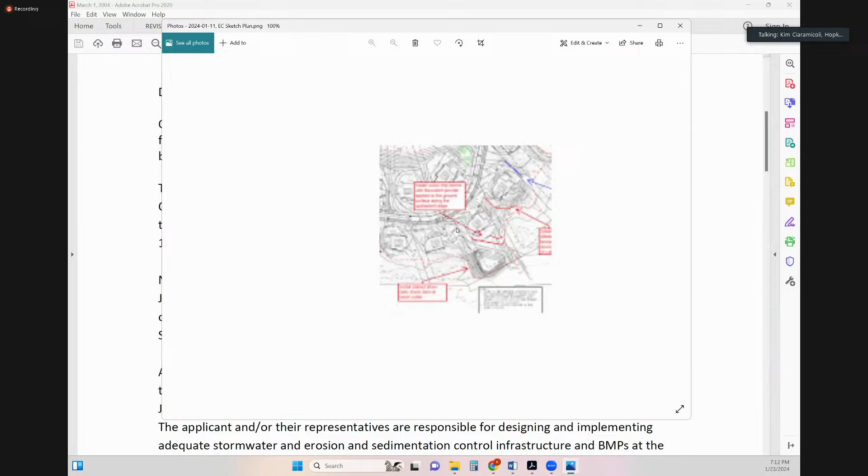They responded the next day. They had their consultant, ESE, out at the site to evaluate the wetland and to make some erosion and sedimentation control suggestions. My understanding is that these suggested BMP measures by ESE were implemented almost completely by Toll Brothers. I think there's one BMP left to install. So the applicant has been responsive, but we do have the history of repeated violations.

I do note that the enforcement order we issued required that the permanent BMPs impacted by fine sediments shall be cleaned as required. So I would question the applicant as to whether that occurred in this particular BMP, which had the discharges. The EO also required temporary or permanent stabilization of as much land area as possible at the subject property. So the commission should probably also evaluate whether that portion of the enforcement order was followed. I know that Mr. Merchant is on the call tonight, so I imagine he is also prepared to speak on this matter.

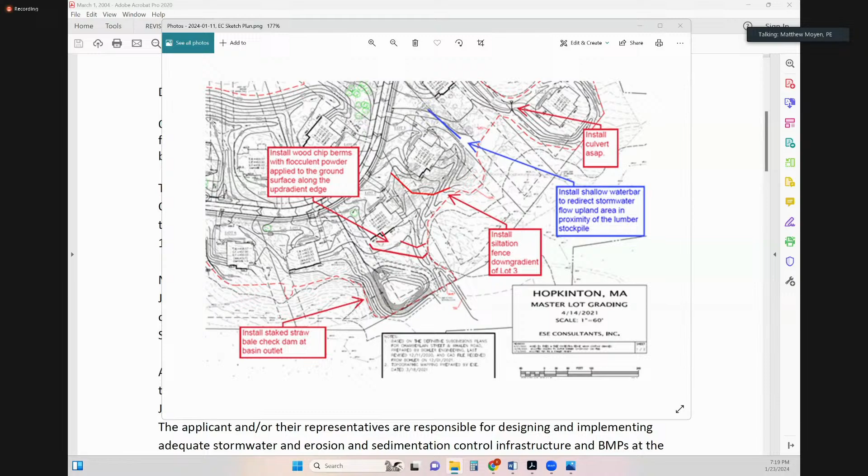Okay, the concern I have there is cleaning them out—just taking the sediment off the top doesn't necessarily guarantee that the infiltration rate is being maintained for post-construction use. So I think it would be wise to reevaluate the infiltration rates at each of these locations prior to street acceptance, assuming that's the case here by the town, to ensure these are going to function long term and that construction runoff hasn't prohibited recharge from occurring.

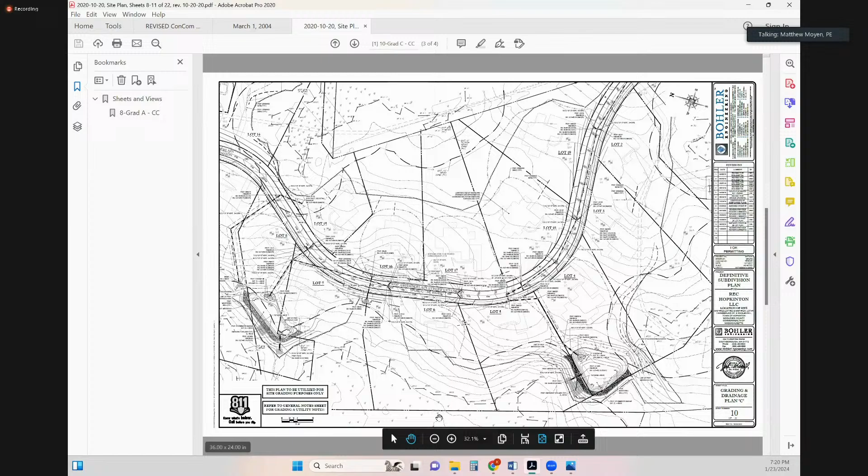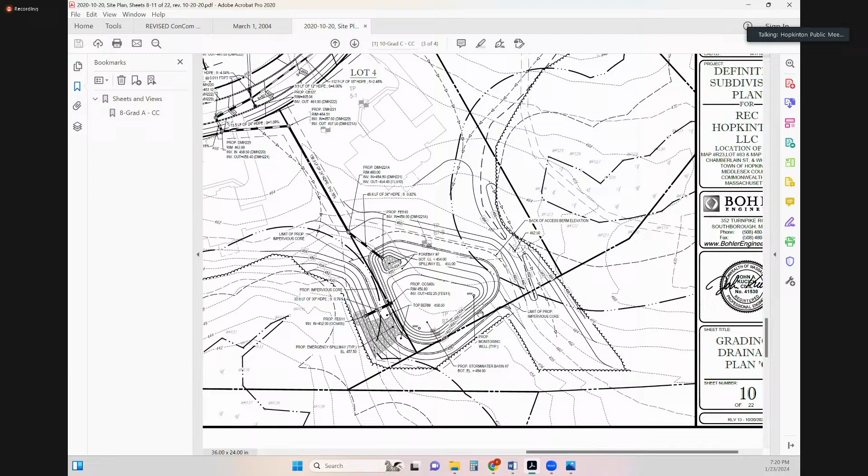So Matt, we would do that following construction, right? Yeah, okay, it's kind of a punch list item. Yeah, once the site's stable and there's no more sediment being directed to the basins, that would be the time to ensure they're still functioning as designed.

Yep, because a lot of times what happens when they get used during construction for sediment control, they choke up and they don't recharge like they were originally intended to. They turn into big soupy messes that really aren't compliant with the standards.

Okay, good point, thank you. Other questions or comments from the commission or from the public?

Jeff, I have a question or comment. Go ahead, Ted. I'm trying to understand, and maybe Kim or Mr. Merchant can help me, where these lots are in the development. I'm also flipping through the photos. Kim, I'm looking at the photo that ends 742 JPEG.

If you wanted to pull that up. What I'm trying to see, Mr. Merchant, is when we talked about violations before in the development of this lot, we talked about how much earth was being moved and left uncovered or barely covered, and whether building the lots required that much clearance. It looks like from the photo I'm looking at, again Kim, the last three numbers are 742, this is another violation next to a radically cleared lot.

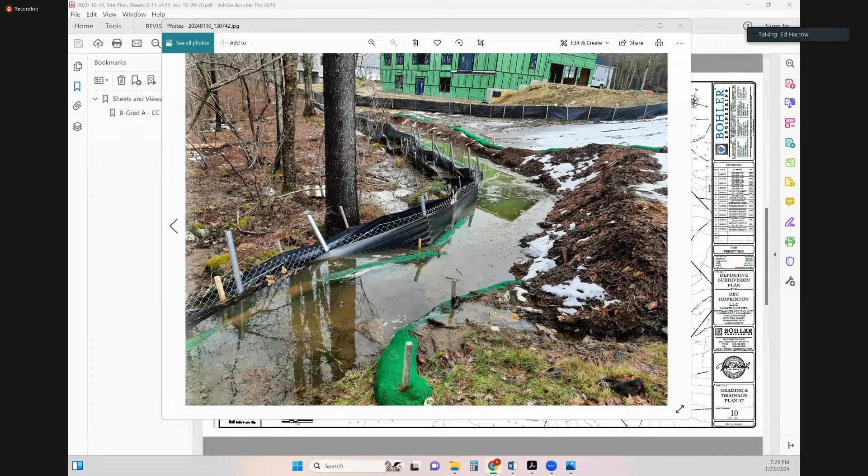But back in December, I have a picture of the Mississippi River flowing down Stony Brook. The bridge at the old Hopkinton Springs down in the DCR behind our house was overtopped with water. So the amount of water that we're getting is way outside of historical norms.

Can I say something again? Yes, Ed, that's true - this year has been historically odd, but it hasn't been every single year. But we will probably get more epic events, and I think we just need to continue to really push for limited disturbance, if you will, before it's stabilized.

I think one of the arguments presented in regards to this development was that there needed to be access entirely around the building for, I don't remember, but maybe a crane for trusses. And we're just going to have to limit as best we can how much area is wide open and not stabilized. But I think this is the time that we can start looking at that a little bit heavier, a little bit more. Jeff, if I may.

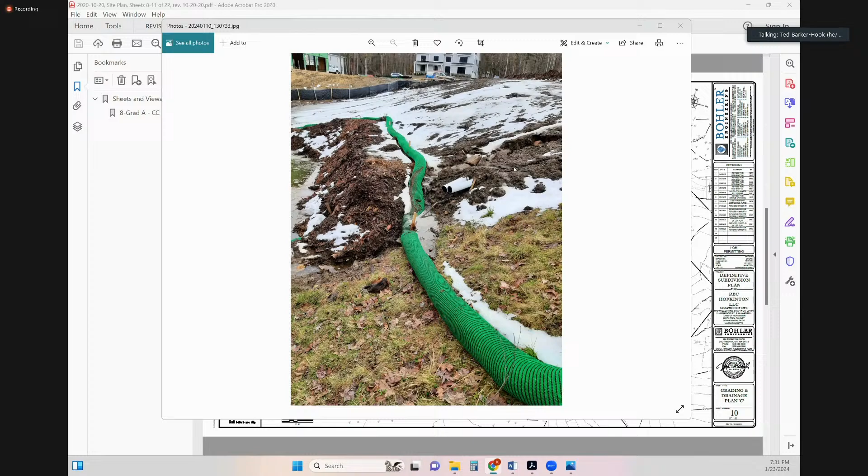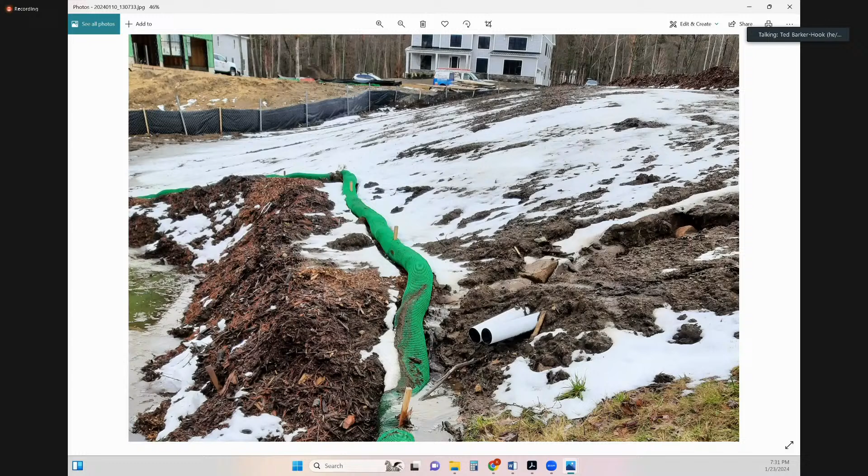Yes, go ahead. Kim, I'm glad you found that photo - I was about to point you to that one as well. Is there any chance you can zoom in so we can see? That just seems absurd to me, that much land had to be cleared downslope to the wetlands. I don't see any straw underneath any of it. That just seems utterly and completely reckless and unnecessary. And I think that goes a long way to explaining, with all the rain that the world now brings us, what happened here.

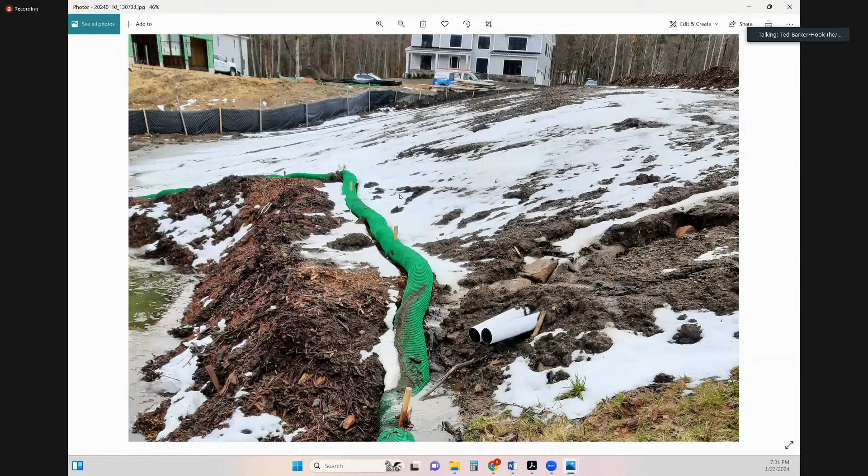So that's extraordinarily frustrating to me. Through the chair, this is Ted again. Y'all may remember back when we were talking about the project in the Blueberry Lane area, where I was quite unhappy about the amount of clearing that was going on those lots, and I was the lone holdout that said this is a bad idea. Just bringing that to your attention.

Okay, thank you. Good comments, Mr. Merchant. I think you folks have ongoing work at this site, with the Blueberry Lane subdivision upcoming. So I think there are a lot of good points made on the call that we need to be more deliberative about minimizing the amount of land clearing going on around these subdivisions.

I think to answer Ted's first question, these types of rain events are unfortunately going to be more common. They're not anomalies anymore. We've had 3 or 4 of them this year alone, where you could basically take a whitewater raft and raft down some of these properties. That's how much water was flowing across them. But all good points, and I think as a commission, it's also incumbent on the developers to minimize disturbance so we don't see this happening on a continuing basis.

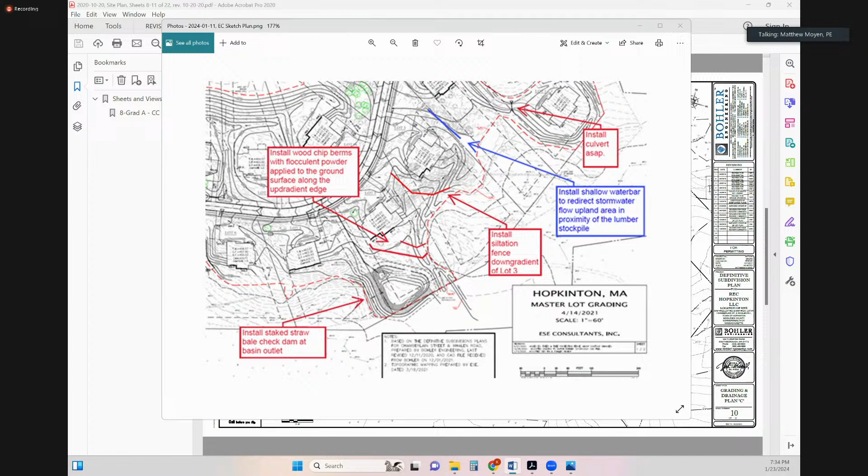Just real quick as it relates to the limits of disturbance. I understand what Mr. Merchant's saying about trying to minimize that, and I get Ted's point about looking at doing it more. I think one of the things that really needs to be focused on, regardless of the disturbance limits, is temporary and permanent stabilization of those areas that are disturbed. From my experience, these residential lots, once graded, don't really get touched again during construction. So they should be temporarily stabilized within 7 to 14 days of that work being completed. It seems like in these pictures, a lot of the lots remain unstabilized. I think that's an important measure that the contractors should be taking, moving forward with this site and any others in town.

Thank you, Matt. Part of the compliance with their construction general permit as well.

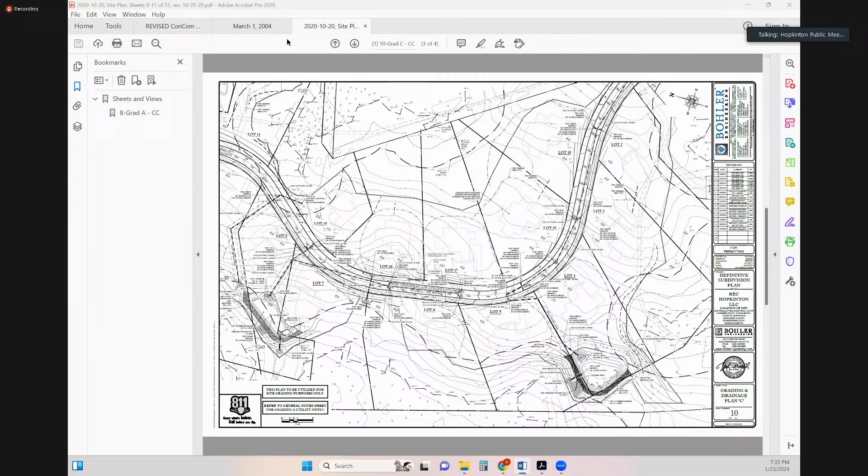Yep, okay. So hopefully, Mr. Merchant, you heard the messages from the commissioners, and if we can tabulate the fines, Kim, we'll look at those at the next meeting as a commission. Will do. Okay, thank you, Mr. Merchant. Thanks. Okay, so we'll move along to the new hearings.

22 Kruger Road. This is a notice of intent to raise and enlarge a single-family home. The Hopkinton Conservation Commission will hold a public hearing on Tuesday, January 23rd, 2024, at 7, virtually online, to hear all persons interested in the notice of intent filed by Terry Anthony to raise and enlarge a single-family house with associated site work. The location is 22 Kruger Road, Assessors Map R8, Block 14, Lot 0.

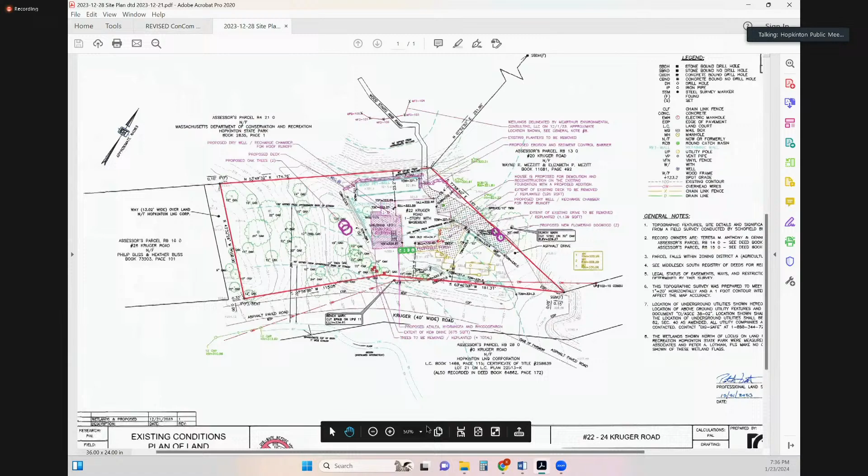Okay. Do we have the applicant or a representative of the applicant on the call? Yes we do, hi, I'm Susan McArthur. Hi, hey Sue, how are you doing? Good, good to see everyone. Yeah, good to see you. You want to give us a little bit of background on the project, if you would please?

Yes I will. Also on the call is Tim McKay, who's the architect for the project. The applicant, I don't believe, is on the call. And just so you know, DEP hasn't issued the file number yet. But yeah, we filed a notice of intent for the tear down of an existing house at 22 Kruger and the construction of a new house within the existing footprint, only slightly enlarged.

So currently, the property contains a 2,900 square foot single family home, bituminous driveway, attached garage down in the back, a large wooden deck, wooden retaining walls, a fenced in garden, and wooden stairs leading down to the back slope to the DCR property in the back. Topography ranges from 334 near the roadway down to 321 feet at the existing house.

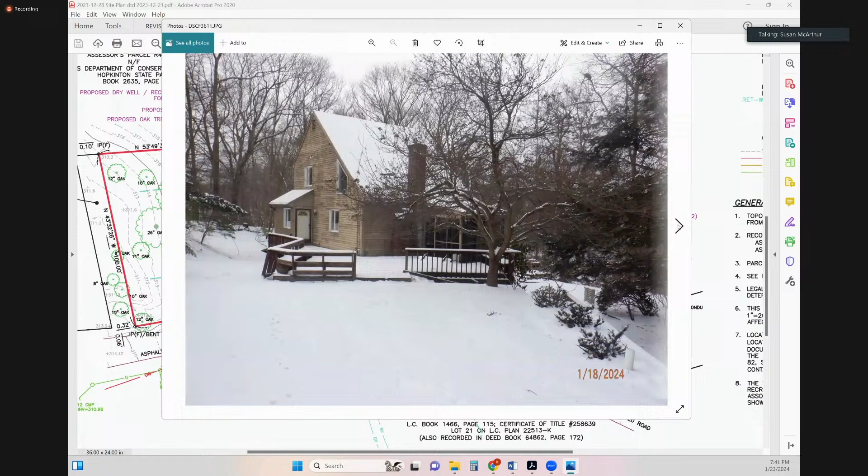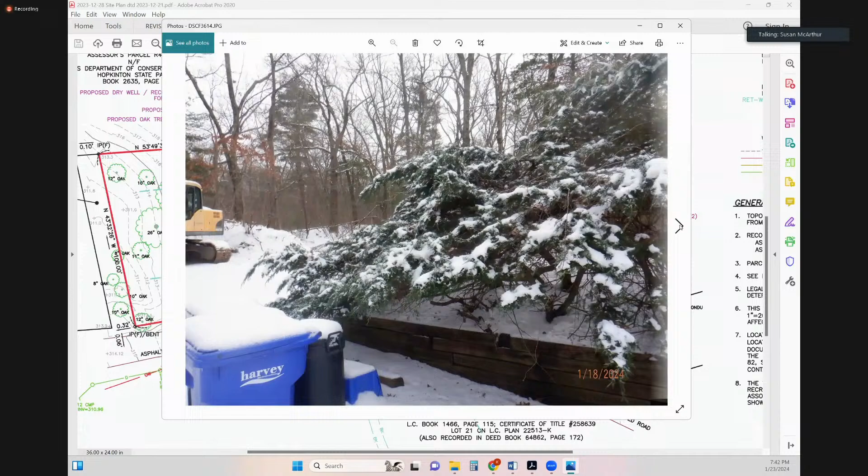So that's the driveway covered in snow in the back. There's a few photos in the NOI.

But anyway, to mitigate for the removal of the 4 oak trees, we're proposing to plant 2 flowering dogwoods where the pavement will be taken up over off to the east side, and 2 oak trees to the west, where the hand is right there, west of the new house.

And then a few shrubs, those 4 green circles out in front of the new house, right there. Those are proposed azalea, hydrangea, and rhododendron shrubs. And I think that's about it.

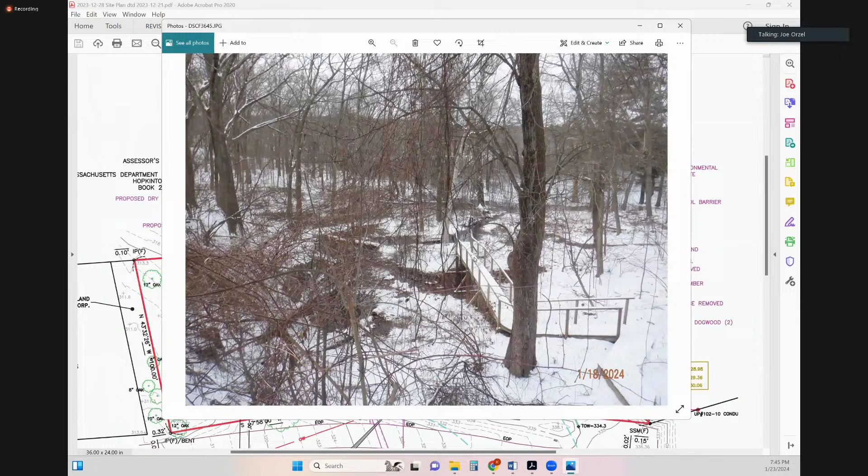Regarding the wood stairs and the ramp, I don't know the history of that, or if that was a permitted activity. They do go through the wetland down there. There's some Oriental Bittersweet and common privet on the developed portion of the site. That's not extensive, but there's some present. Would recommend some comment on how those will be addressed during construction.

Also, the project narrative notes that there are 4 oak trees proposed to be removed for construction of the driveway. When I was out there, there were at least 6 oaks and hickories marked with a red X, so just looking for confirmation on whether that's an accurate number of trees proposed to be removed, in that general area where the red X's are shown on the plan. The contractor had marked where he thought maybe the trees were going, but we determined only 4 need to come out.

The stream across the street is delineated, but no delineation flags are shown. I don't know if that's because it was off-site, or how that stream was located on the plan. It looks like it's generally pretty accurate, just pacing out where it's shown to the edge of the road, but maybe a comment on how that was located and possibly showing the actual delineation flags. Without the actual delineation being shown, I don't know how certain the commission can be of verifying the extent of the buffer zones on the site.

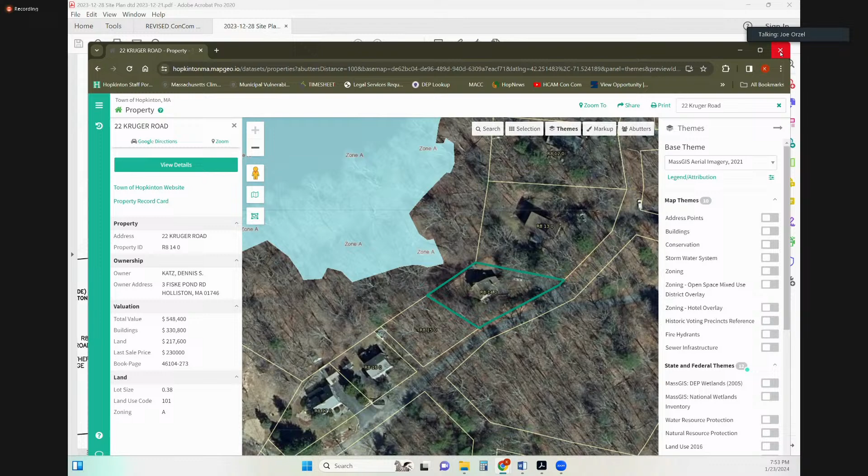Okay, can you go back to the plan, Kim? Thank you. Okay, there were dry wells proposed. Just thought that some calculations regarding the sizing of the dry wells be provided.

And then just some relatively minor notes and some items in the BVW determination forms that don't really affect the determination of wetland or upland. Also a note on whether or not, although the color plan was provided, it doesn't meet the requirements of the bylaw colors. I don't know if the commission is too worried about that or not, but I just thought I'd point that out. And as Susan mentioned, there's no DEP file number yet for the project.

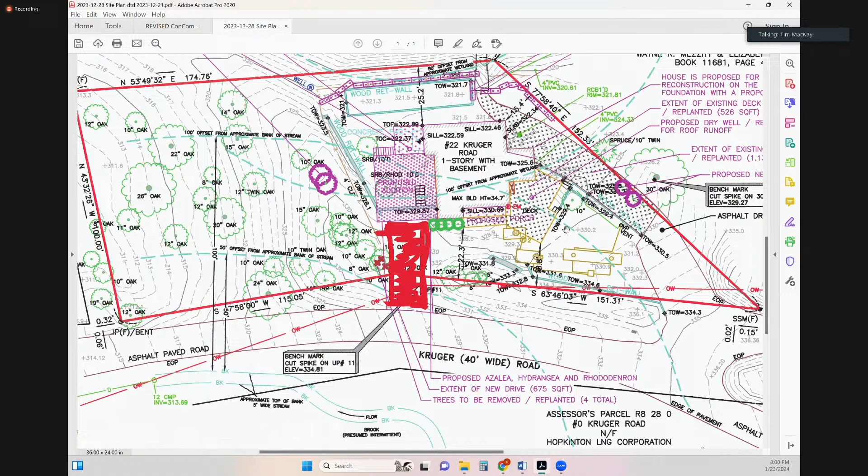I'd also like to note that the proposed foundation wall for the garage will handle the majority of the retaining. Where the wall exists running parallel to the front of the garage, that wall will no longer be there. We looked at removing entirely the wooden retaining wall that juts out at an angle. However, we were concerned that taking it out entirely would disturb the vegetation above, and that's not anything we're interested in. So as much as we can, we will retain the profile of that wall and replace any compromised structure along it as much as possible. The intent here is to preserve as much of the natural vegetation on site as we possibly can.

I certainly appreciate that, but there needs to be notes saying what you're going to do with the existing walls, whether you reconstruct it with a masonry wall or something else. Right now there's nothing there, including the garage area in the back. I think until we get out there, it's going to be difficult to really understand what the scope is. The note could say existing to remain to the greatest extent possible, if that makes sense. I don't know, I'll open it up. I'm just very uncomfortable with not specifying what's happening with that. If there are changes to the plan, we'd be certainly happy to come back before the commission, but until we get out there and really start evaluating the structure of these retaining walls...

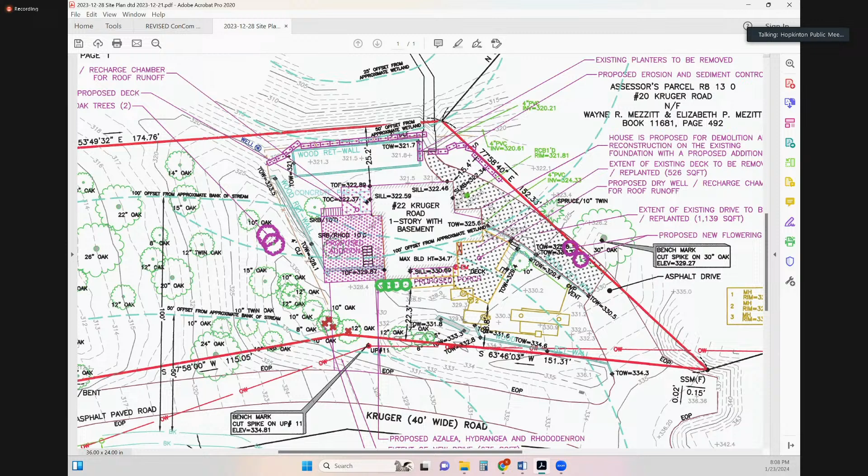So Sue, there's some T's that need to be crossed and I's that need to be dotted here on your end. Yeah. So I think we need to continue this out. But before we move on, I just wanted to ask about the bridge on the state property there.

The wood stairs and the ramp through the resource area, was that put there by the owner? No, they told us it was there long before they bought the property. Okay, it's been historically there. So, I mean, they're not in the best of shape, but they're functional. Yeah, it might be better to hear that they're in real good shape, because at some point in the future, the next owner may come and feel like rebuilding it, even though it's on DCR property. Well, I suspect this owner is going to be there a long time, given the fact that they're building a new house for themselves. So, oh, there you go. Okay, well, that's my guess, but yeah, okay.

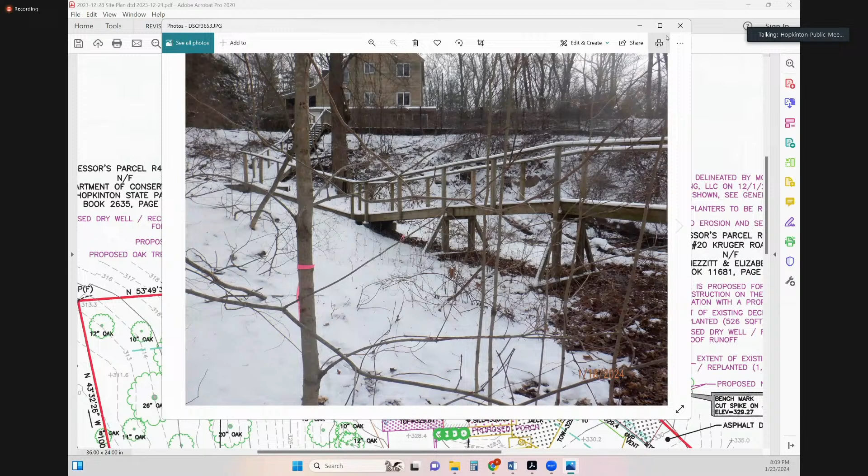Okay, I just wanted to bring that up. It's on DCR property. Okay, I'll have to think about that. Maybe we can talk about it.

I have seen and helped with permitting for other properties on Lake Cochituate in Natick, where they've gotten permission from DCR to put stairs and a boardwalk on DCR property going down to the lake. So I don't know that this is that unusual.

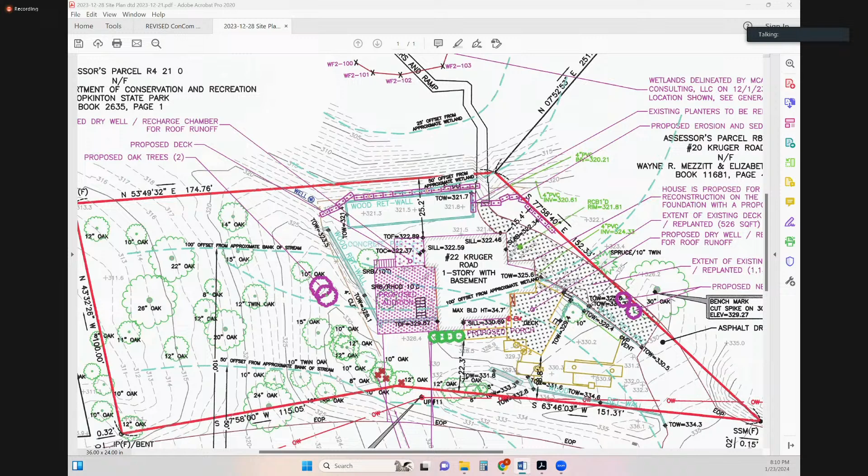Okay, we got to move on because we have an executive session coming up. Chair, if I can get two words in. Go ahead, Ed. Living adjacent to DCR property, I can confirm there's more than one occasion where such things exist. We're aware of that, but thank you. I can confirm that. Okay, Sue, so we'll continue.

If I can get a motion to continue the hearing, is February 6th going to be sufficient for you to address the items we've discussed? Through the chair, do you want to get public comment? Oh yeah, sorry, Anna, is that what you're going to ask? Yep. Is there any comment from the public at this point?

Hi, this is Heather Bliss. We're an abutter to the property. This is the first hearing or notification we had about the building and development, so we do have some questions in terms of the tree removal noted in this plan versus what we're seeing in terms of the trees marked. There's definitely dozens of trees with red marks on them, some very close to our property. I assume that was part of an initial test and not for removal, but certainly close to our property line, we did see red paint on trees, and it seemed to be dozens marked. Am I wrong in how many are marked with red paint in that area?

May I address that comment? You may, go ahead, Mr. MacKay. As part of our survey to identify the trees on site, we did mark them just to note that we had recorded them. As I noted earlier, we have zero intent of taking down any tree other than what is absolutely necessary to put in the driveway. We're hoping to reuse the existing driveway, however part of it's on an abutter property, and that driveway has failed - it's been undermined by erosion and is otherwise not able to be used. So to answer your question, it's certainly not the intent to take down any trees other than what is noted on the plan.

So the four trees, correct, Mr. MacKay? Correct. And that was going to be my other question - why does the driveway have to be reconstructed in such a way where it is obviously moving from one side of the house to the other? I just wasn't clear on why that had to be.

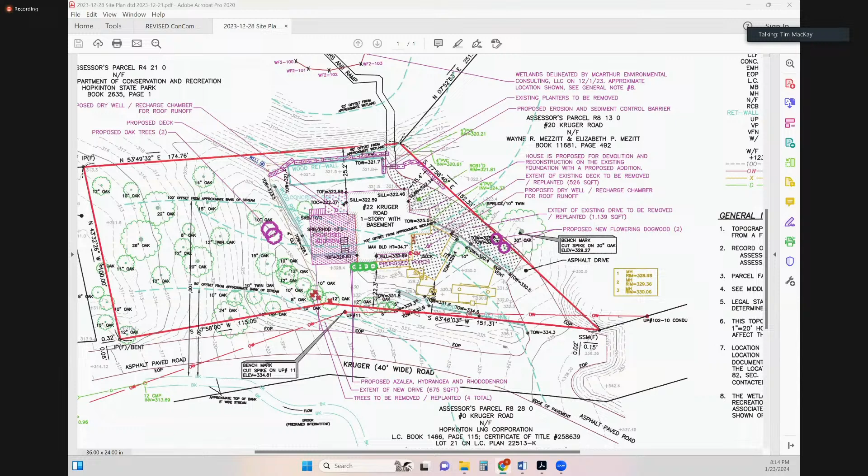And then what is the total square footage of the proposed new complex or house? I don't have it off the top of my head, but Susan, did we note that in the NOI? I can't remember. The new driveway is 675 square feet. No, the square footage of the house? Well, it's in the same footprint, and the existing house is 2,900 square feet.

And so that proposed addition is not included in the square footage of the new? So it's a 25 foot by 25 foot garage on the ground level with an open bonus room above, so the square footage will remain relatively consistent with the addition of what I just noted. Okay, and just as a first-time person participating in these conservation meetings, is there any impact to our property running downhill from that?

Mr. Chair, would you like me to answer that as well? Sure, go ahead, Mr. MacKay. I'm an architect, I'll defer to any number of the environmental scientists on this call, but I believe that, based on comments from the peer reviewer and the commission, the majority of the concern is both Plan North and Plan South, not necessarily Plan East or Plan West. But certainly we'll do what is absolutely necessary to make sure that runoff is eliminated during the construction process.

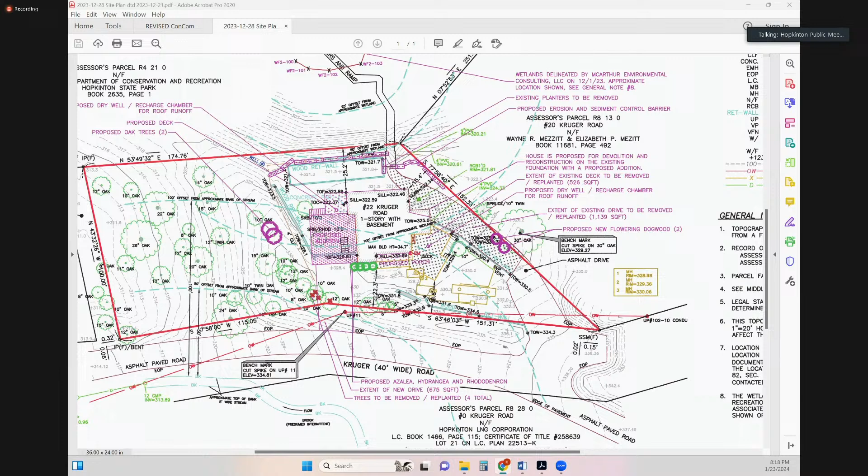So if I can get a motion to continue this to February 6th. So moved, and a second. And we'll do the roll call. Ed? Aye. Ted? Aye. Matt? Aye. Jim? Aye. Melissa? Aye. Janine? Aye. And I'm an aye.

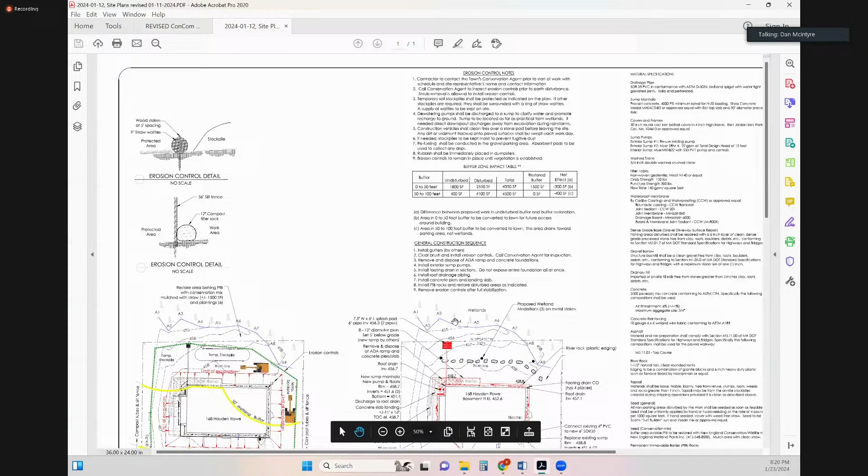Sure. At our last meeting, there were a couple of questions and a couple of notes we wanted added to the plan. So we did that with respect to the contractor obtaining a road opening permit as required by the DPW. And we also put a note on the plans to keep the height of the stockpiles manageable so they don't overtop the silt fence.

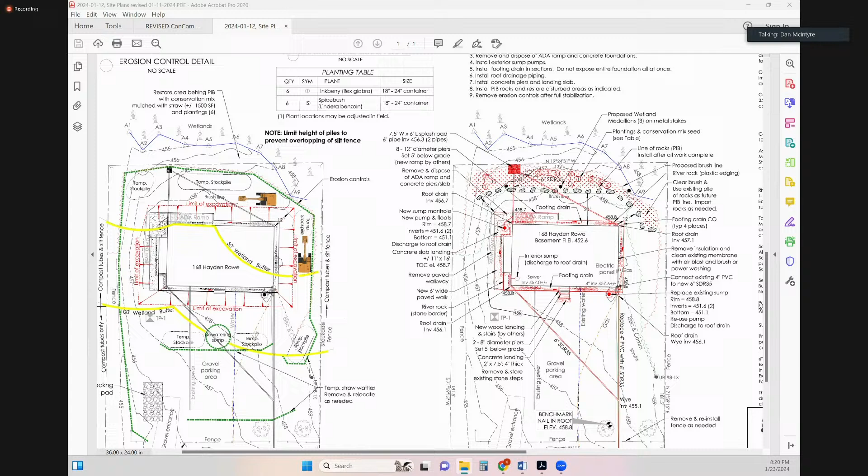In addition, we provided Kim with a schedule of the work that was requested. And we developed an invasive species management plan for that buffer zone area. This is both for the contractor to control how he initially digs out those invasives, and also for the society members who have agreed to try to manage that as time goes on. If they see the invasives start to sprout back up, they have a plan to control it. Okay.

We are still waiting for a DEP file number. I can't shake that loose out of the central district, so I'm not sure what's happening down there. All right, so I think that addresses the outstanding items that we had as a commission.

Joe, Kim, did you have any additional comments? So Jeff, this was one that I had reviewed. I reviewed the additional materials provided by Dan, and I didn't have any additional comments. I felt that all of the materials addressed the concerns that I had in my initial comment letter. Okay, great. Thank you, Kim.

So, questions, comments from commission members? Questions or comments from the public? Okay, so unfortunately, we'll have to continue this out until we get the DEP file number, Mr. McIntyre. Understood.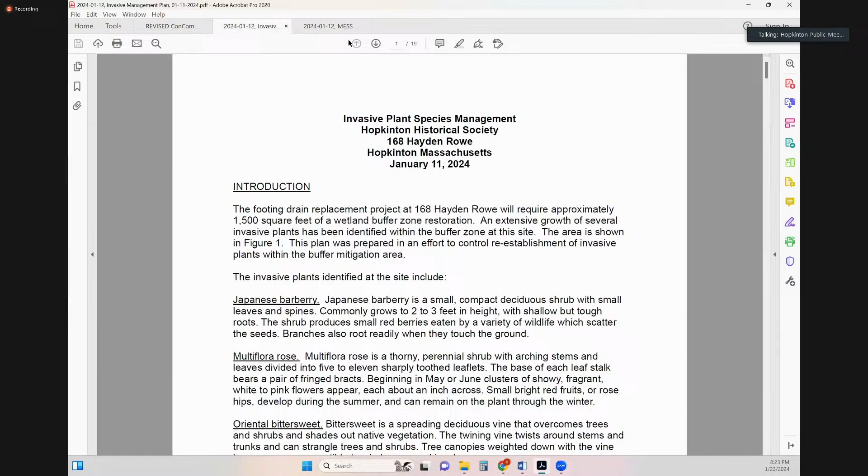So if I get a motion to continue to February 6th. So moved. Ted, I'll second this. Okay, and we'll do the roll call. Ted is an aye. Ed, aye. Jim, aye. Matt, aye. Janine, aye. Melissa, aye. And I'm an aye. Okay, all right, great. Thank you, Mr. McIntyre. All right, thank you.

Okay, so Hopkinton Stone and Garden is continued until February 6th. So that takes us to work session items. And Kelly, 9 Montana Road, we have an informal discussion.

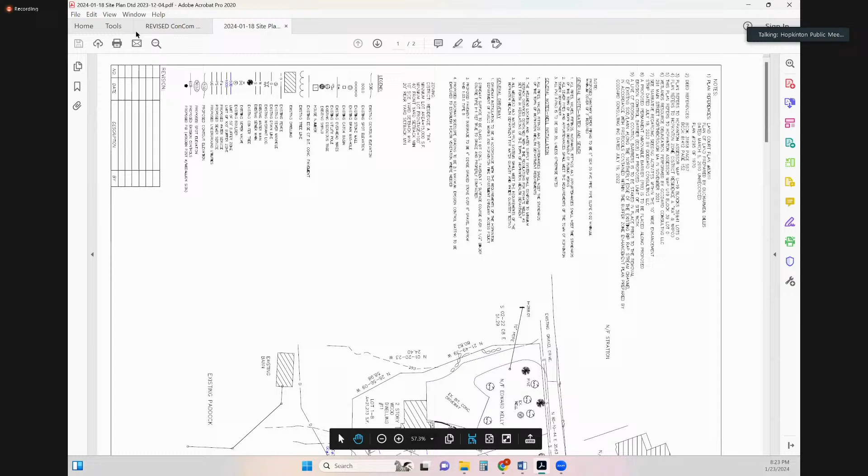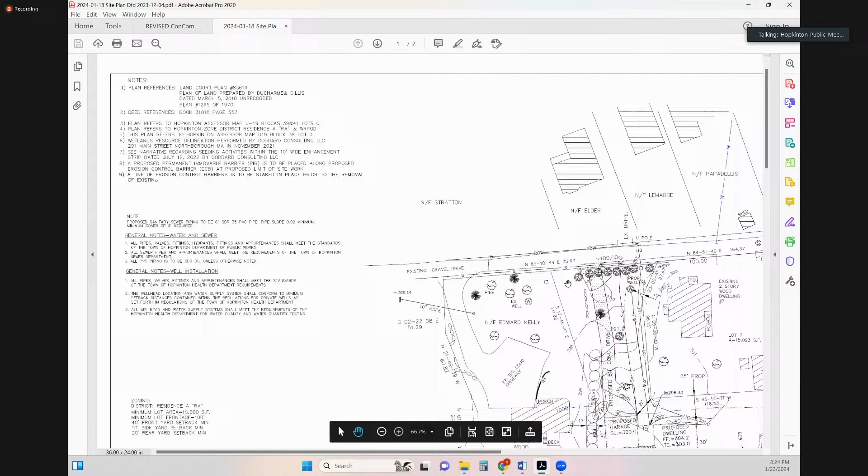So do we have someone on the call? We're 9 Montana. Yes, I am here as well as Ed Kelly, the owner. Okay, good evening, Mr. Marquedant. Evening. And we got to kind of move along here, so you want to give us a quick overview? Sure.

The commission may remember the review of this plan. It's file number 188-1790. The order was issued back in August of 2022. It has installed erosion control barriers, has installed PIB, and is looking for a spring start on construction. What has come up in his discussions with the designer of the home is that an additional driveway from Maple Street Extension would be an amenity that would be helpful or useful to this property. So we have done some preliminary investigation, talked to DPW, talked to the building inspector, and it is entirely possible to build this driveway, to permit this driveway.

So we are here after much discussion and some back and forth with Kim and Anna to just have an informal discussion and feel out the board regarding a driveway at this location. I've highlighted it here in red, a short driveway, 12-foot wide, in line with the Hopkinton Fire Department guidelines for access driveways, shown at this location. You may recall the site is a meadow, is a grassed area. The location chosen to access the pavement at Maple Street Extension fits nicely between a couple of large trees, so no tree clearing, just some lawn or some grassed meadow that would be replaced with a driveway.

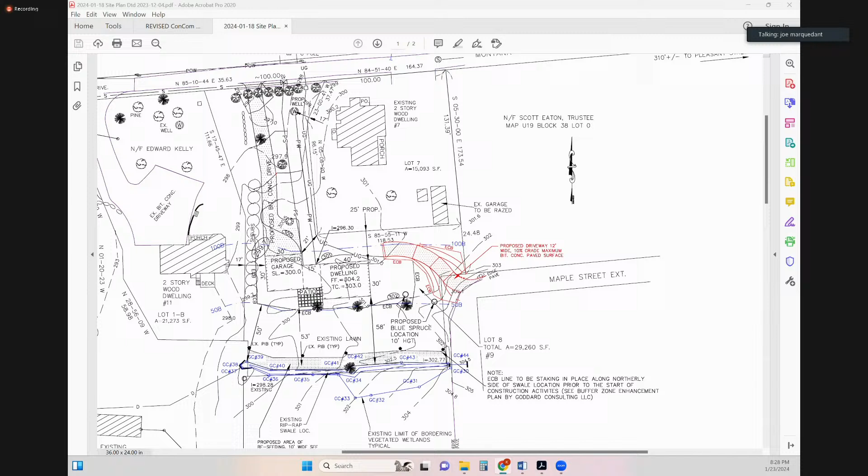Okay, so the draft annual report, Kim. That looked really good to me. I appreciate you putting that together. I don't know if folks got a chance to look at it. We do have an impending deadline to get that into the town within the next few days. So if you haven't had a chance to take a look at it, if you can do that in the next day or so, and if you have any comments, get those to Kim ASAP.

The one comment I did have, Kim, was I think you got your new certification, correct? Just recently, I did get a new certification recently. So can we add that in? Sure. I think that is, you worked hard to get that, so I'd like to see that in the report.